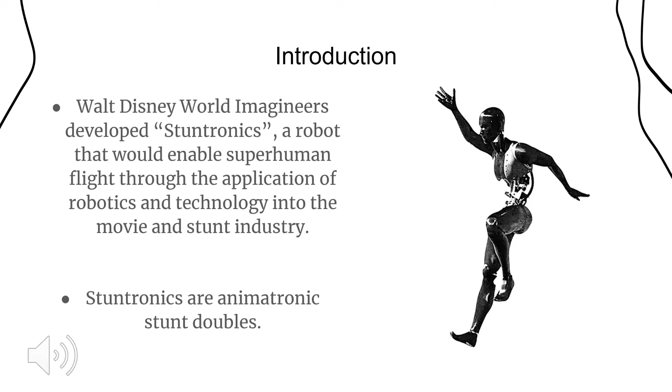Each Stuntronic comes equipped with numerous sensors which allow it to flip, twist, and make any number of acrobatic movements, with repeatability and precision. This allows for very human-like movements and repeatability with a robot, in which you do the same movement over and over again, unlike a human stunt performer, which can have variations from take to take.

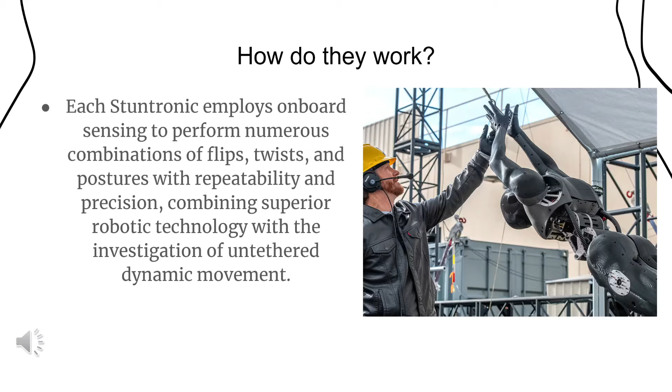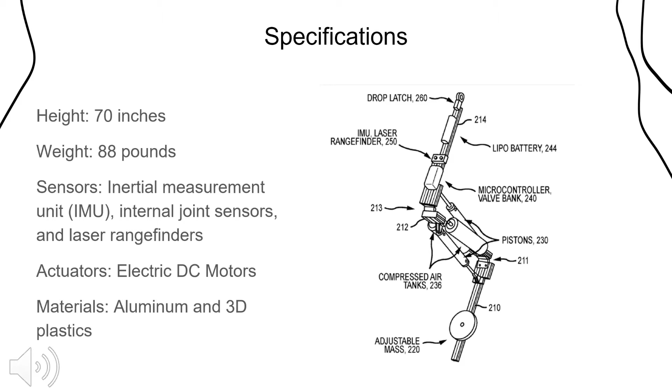When we talk about specifications for this robot, it's very important to know that its height is 70 inches, or 5 feet 10, it weighs about 88 pounds, and it has three main sensors. One of them is the inertial measurement unit, or the IMU. It has internal joint sensors and laser rangefinders. It has an actuator, which is a DC motor, and the materials used to make the robot are mainly aluminum and 3D plastics.

So what is an IMU? The Stuntronic is equipped with one. It's a device that measures angle and force. The sensor allows for 10 degrees of freedom, and it does that by using a bunch of gyroscopes and accelerometers to measure angle and force respectively.

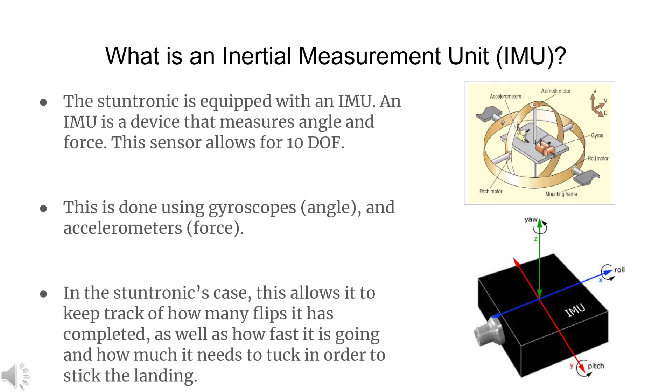For the Stuntronic specifically, it uses the gyroscopes to keep track of where it is in the air and how many flips it's completed, and the accelerometer measures how fast it's going and how much it needs to tuck in order to stick the landing and not fall over or anything like that. The Stuntronic is very capable of landing on its feet, and the IMU allows it to do that.

As said in the specifications, we have internal joint sensors in this robot. They are used to obtain information about the robot itself. The joints use sensors made out of position sensors, velocity sensors, acceleration sensors, and motor torque sensors.

All of this information is given and presented to the people in charge of the robot to make sure that it's flying in the right direction, that it has the position it needs to do all of the jumps, and to make sure that the robot is acting the way that it should be, so they can get the shots and do the stunts that the human body wouldn't be able to do.

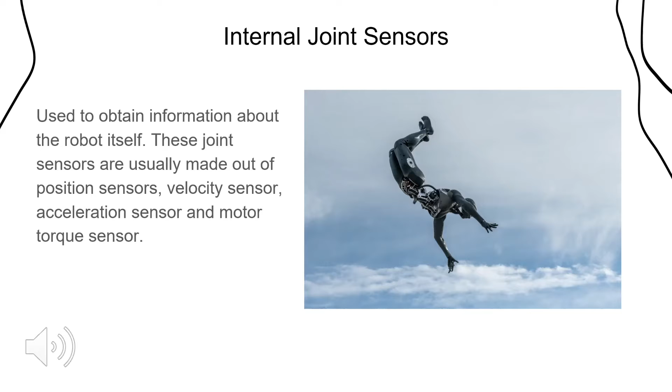The Stuntronic is also equipped with 3 laser rangefinders. These allow it to see where it is and when it needs to tuck or flip in order to land and not fall on its face. The laser rangefinder works by emitting a beam of light, and that light bounces against an object and comes right back into the rangefinder, and that distance is measured between the sensor and the object.

That allows the Stuntronic to see how far it is from the ground, which helps with velocity adjustments, and it also allows it to see how fast it's approaching the ground by continuously using that sensor over and over again to see when it needs to tuck in order to get that perfect landing every time.

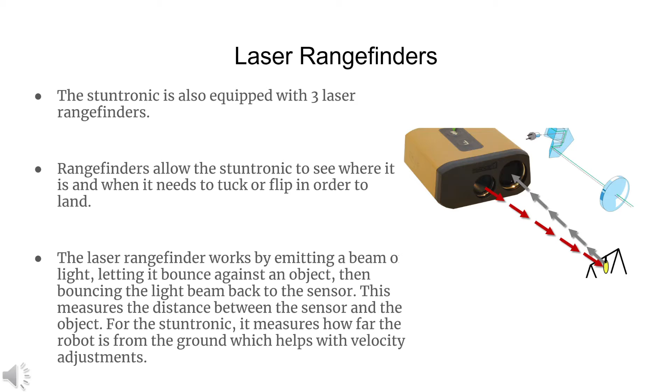When asked why Stuntronics or robots like this are needed, they are needed for a safer movie making experience. The movie industry and stunt industry is very big, and there have been multiple incidents of accidents where stunt artists got hurt in the making of a movie. By using a robot, that reduces the level of risk for those artists by a lot, if not at all.

With Stuntronic robots, stunt teams test new ways of creating tricks without the human body being the guinea pig. It makes for safer movie making and more interesting scenes, like having the superhero do more crazy things because they're not actually putting a human in jeopardy. They're just using a robot who is lifeless.

A good example of this is Tom Cruise testing new stunts for Mission Impossible. Another good example is using Stuntronics in Spider-Man. All of these movies have very different stunts that are performed, and mainly most of them are done by robots, so there's no human life put in danger in the making of these.

Because Stuntronics are in its infancy, there are only a couple of practical applications at this moment, one of which is that it's currently being employed at Disney's California Adventure at the Avengers campus to bring Spider-Man to life. In the show, you can see Spider-Man swinging from web to web, which is actually the Stuntronic doing flips above the crowd. In the future, it can be used on film sets.

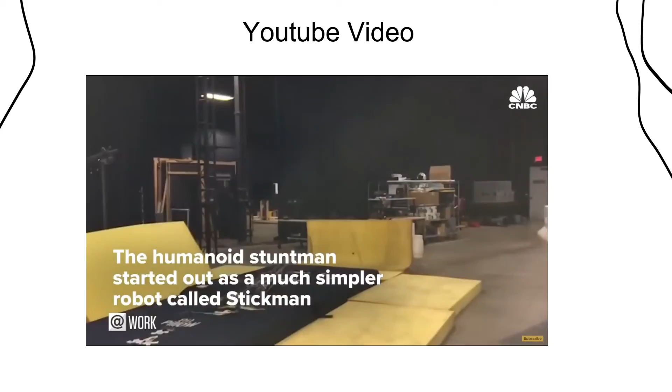To conclude this presentation, we've been talking about how Stuntronics have been revolutionizing the movie making industry. It allows for high energy stunts without risking crew and stunt artists.

While doing it, they have very different sensors. They have laser range finders, IMUs, and joint sensors that allow the Stuntronics to make flips, twists, land, and make human-like movements without risking somebody's life in the making.

So it is something that will be getting bigger and bigger in the future, and will probably revolutionize how movies are made, and how the stunt industry will move in the future. Thank you.